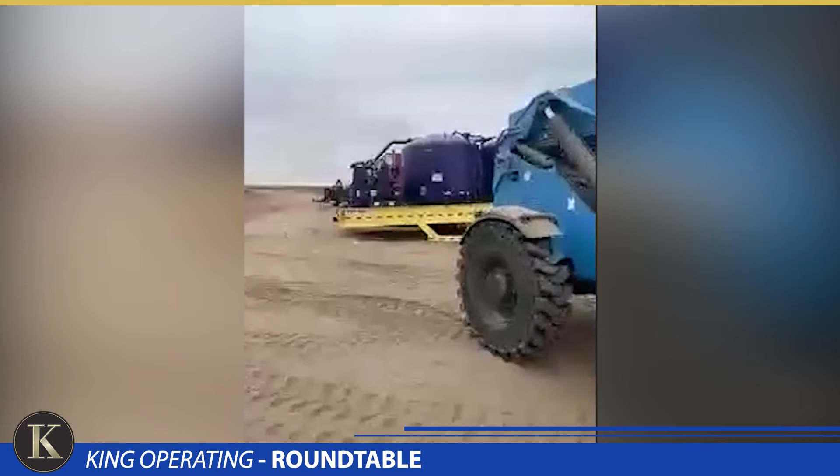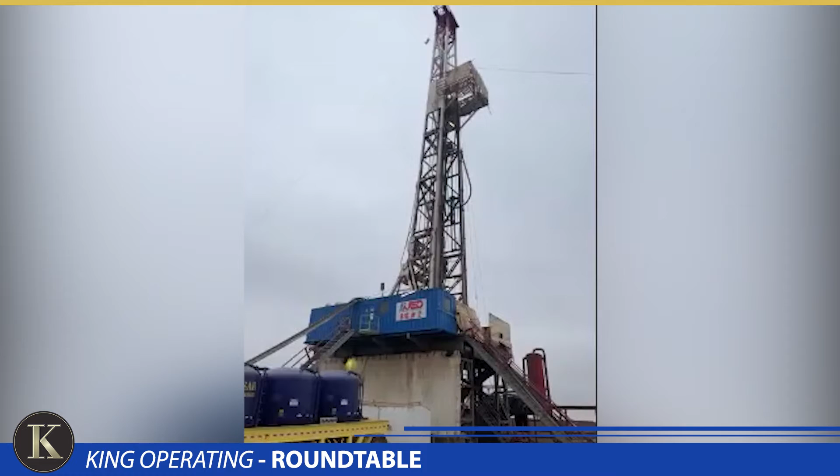Yeah. So that yellow thing, I don't know how good of a view you got of it, but that yellow thing is the top drive. There's the doghouse right there. There's Chandler. Jay, is Chandler waving at me right now? Yeah. From where it says rig number 2, that's where he is right now. He's in there. Good call. Your rig. It's a big rig.

Hey, Jay, describe where the derrick is. Do what? Jay, describe where the derrick is. Put your view back up there and show us. Point at the derrick. That's the derrick right there. Right, so that's where your pipe is. So you're drilling right there. So you're picking up pipe. They just picked up some more pipe.

That yellow deal, which is the bottom hole assembly, right there, as you see it, it's kind of hard to see it, but there's a yellow piece of equipment, and that lowers the pipe in the hole. So you put weight on the bit, and the bit turns to the right, and all of a sudden that makes hole in the ground.

And when that yellow piece, the BHA, bottom hole assembly, when that thing comes all the way down to the bottom, they have to pick up more pipe, go back up to the top, and then drill down all the way down again. And they do that repeatedly until they reach total depth.

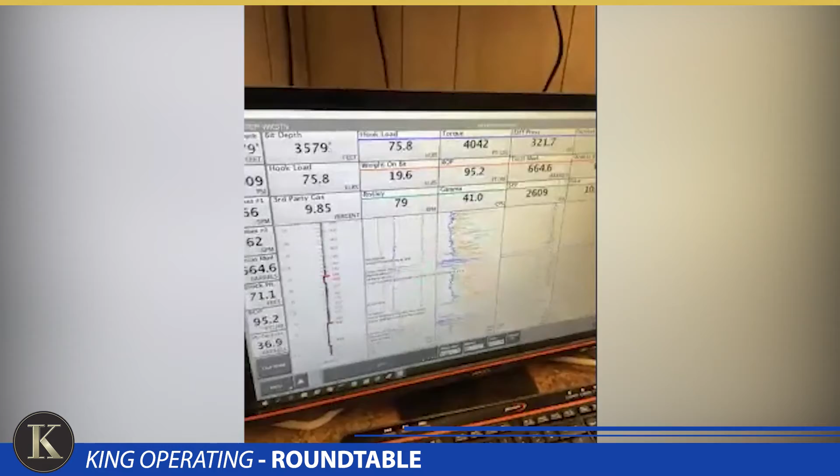So I'm gonna pop over here to your awesome dashboard. This is a live dashboard. Adam, tell us what overall we're looking at, and then we can get into some of the details. Well, over here is our bit depth. It's 3580, and then it's showing us our torque, how many gallons per minute we're pumping, about 540 gallons a minute down the hole.

And it shows our inclination data, showing that we're sitting at 8.1 degrees, which is the angle of the hole. At a 179 azimuth, which means we're actually coming back to the right, which is very good according to our geological plan. All right, right on point.

So the inclination, why is that important to know for the drilling? Well, that's because we're building angle. So as we're building right now, we're sitting at 8 degrees. This is called the tangent section of the hole. So we'll hold this all the way to about 6,100, I believe. Okay.

So as far as all this goes, it's telling us that we are in perfect placement, and it allows me to see the hook load, what the strings weigh, how much weight you're running on bit. So with this little computer, you can see everything they're doing on the rig floor. And it's live.

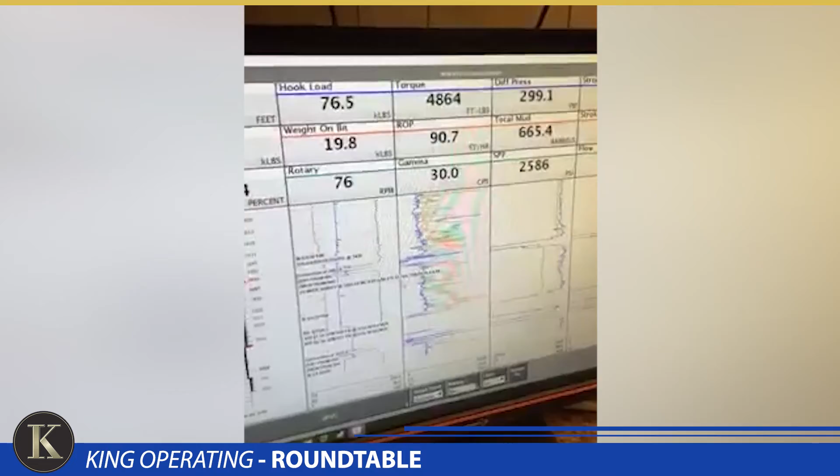Right on. So is this something you're watching all day? All day long. And I got it on my phone as well. If I'm out walking around location, I can pull it up and see the same thing on my phone. Right on.

So as far as depth, looks like we're about halfway, a little past maybe halfway, somewhere in that range. Kickoff point. Yes, sir. Kickoff point. Okay. And that's when you turn to go horizontal? Yes. We'll start building the curve there around 6,200. And why do you build a curve? Can you talk to that?

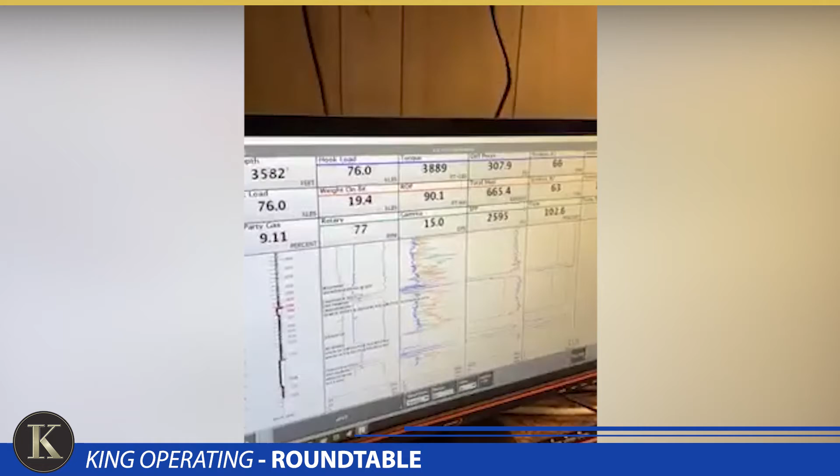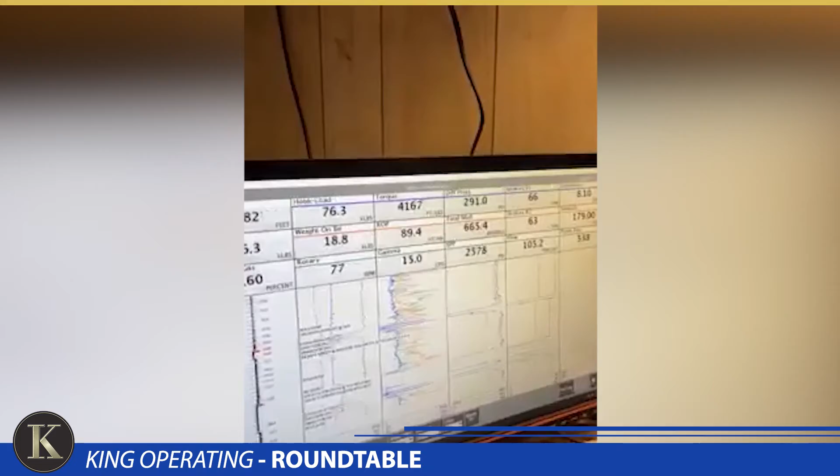So you and I were talking earlier, Adam, about how you know this area really well. Give us a scope on what the wells have been putting out as far as barrels per day up and down this area. Well, a couple miles down the road, we drilled about a 5-well pad. The production came on pretty strong, anywhere from 350 barrels a day up to 650, and most of them are holding pretty steady. Right on. So pretty good opportunity, we think, here. Yes, sir. 100%.

All right. Well, listen, Adam, thanks for giving us some insights to the graphs and just understanding the technology. I mean, man, I think drilling has come a long way. So appreciate your insights. You're welcome.

All right. So, hey, Jay, Stu, you're back. I don't know if we wanted to get over to Jay. He's got a different part of the room, I think. Oh, you bet. Jay, are you there? I'm here. Can you hear me? Oh, yeah, we can hear you. There you go. Good. All right, Jay, you're in the mud room, I think. I'm in the mud logger room. Mud logger room. All right.

Mud logger, what we're doing right now is you have the same type of scale here to find out what's your gamma, what's your penetration rate, how fast are you drilling. The big difference here is samples. So about how many feet? 30-foot samples. So every 30 feet, the samples come up out of the ground.

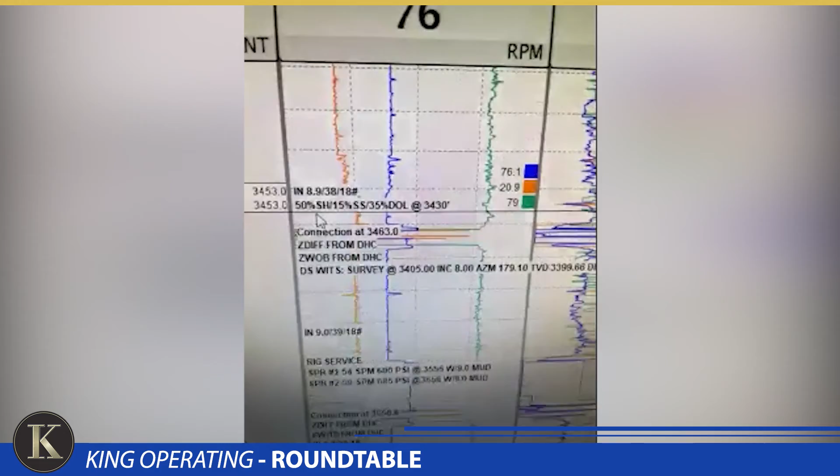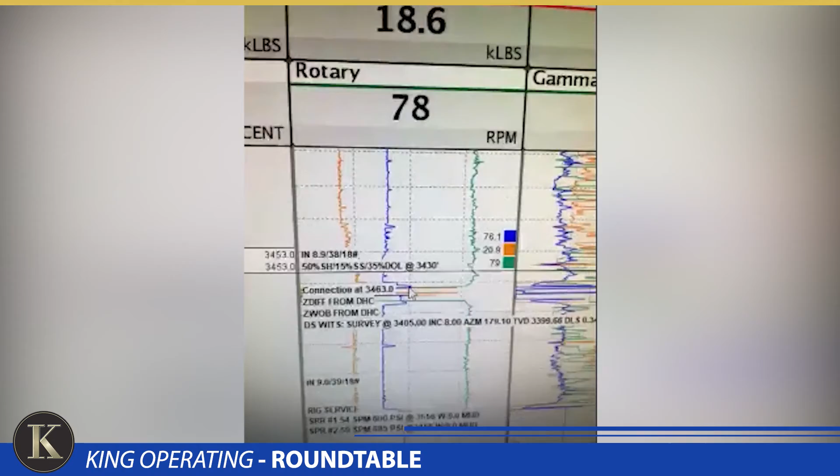When he gets his samples, he puts them on the Pason so we can all see. You can see that they're 50% shale, 15% sandstone, and 35% dolomite at 3,400. What's dolomite? Dolomite is the formation that we're drilling. Okay. Very unforgiving formation. If you don't keep your mud properties in shape, it'll take the mud away from you.

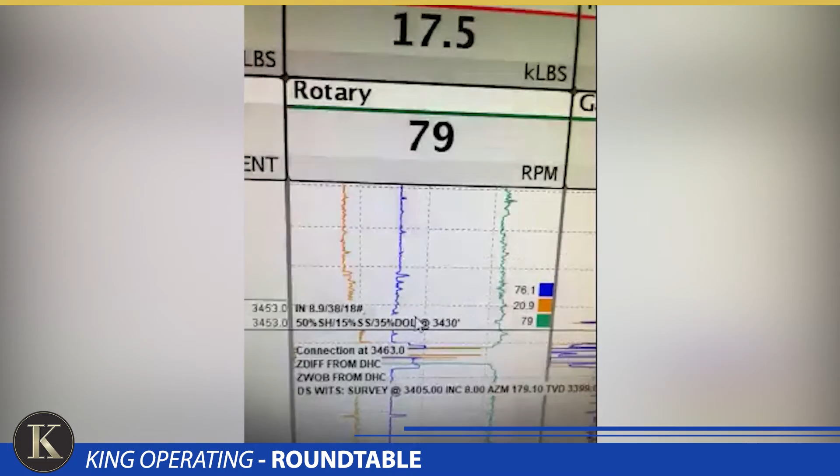You'll lose returns. So it's a tough formation. It can be unforgiving at times. It'll stick you if you... When you say stick it, you mean your drill pipe will be stuck in the hole? Oh, it's a whole other operation, and we don't want no part of that. Okay, so you want to keep it smooth, and that's the way to do it.

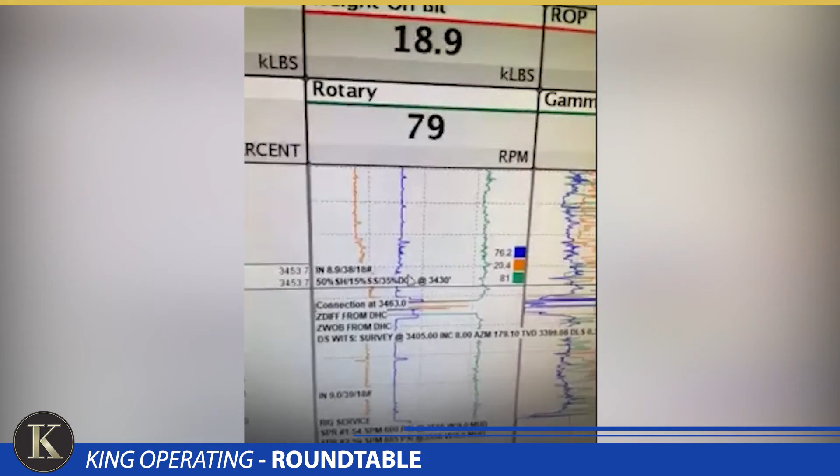Yes, sir. So with his samples, he's telling us if he starts getting samples that are saying limestone, as far as weight on bit, how fast I'm turning it. Okay. So he gives us great data from that mud logger. So the mud logger helps you understand how to proceed with drilling in case you run into something or don't, or how to avoid it, all of that. Yes, sir. Okay, awesome. Thank you, Adam.

That's great. Hey, we saw you guys were kind of blanking out there, Jay. So Adam jumped in to help fill in the importance of the mud logger. Is that what it is? Yeah, mud logger. Okay. Jay, are you there?

Okay, so hey, we're looking at the same type of machines here that catch a sample, and you'll see it when we're obviously at 3,500 feet, 3,589 right now. So we're not down into deep stuff yet. We don't have any big gas kicks, but you'll see this in the future. That's what the mud logger trailer is, to make sure that we catch the samples and also catch gas kicks and see how big of gas kicks they are, what's your penetration rate.

If all of a sudden you speed up drilling, that means you're in a porous formation. And if there's gas kicks there, then hey man, you got something you need to look at on an electric log. We'll go over electric logs on one of our next episodes.

Okay, so back to you. So I'm gonna get off this because it's probably gonna kick me off again. So I'm gonna get off. Any questions, Peter? I'll come find you. Okay, thanks. Okay, sounds great.